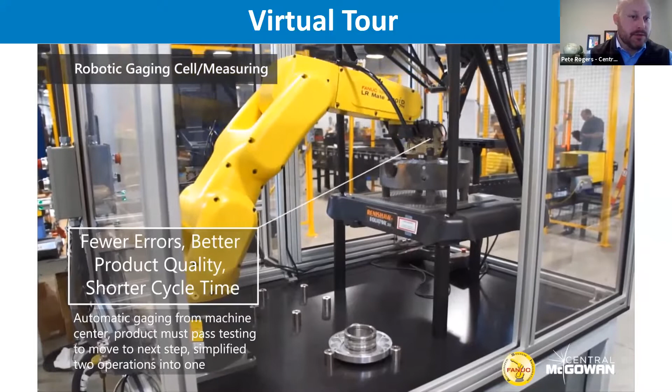One of the benefits of automation as well, when I was talking about part consistency and some of the assembly processes, is being able to take some of the quality control and bring that in process. This system here is literally a robot picking up a part, setting it into a small CMM and getting measurements on it. And so what's happening is you'll see two locations where the part can set.

This actually is getting smashed in between a process. So a robot's actually loading the one station and then another robot's unloading the other station, right? So this robot's job is literally to pick this part up and put it in a gauge and measure it. Some of the cool things happen with a system like this, especially in machine tending.

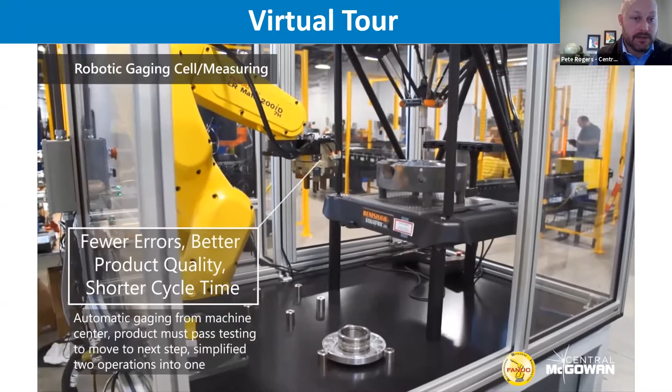So you imagine you machine 700 parts and then you gauge a couple of them and you find out, oh crap, 200 of those parts, I had a bad tool in there, they're all scrap, right? This allows you to measure every single one, but now say you did find a scrap one, you can shut that machine and that process down immediately, right? So you might end up with 2 bad parts or however many are in queue instead of 200 at the end of the day.

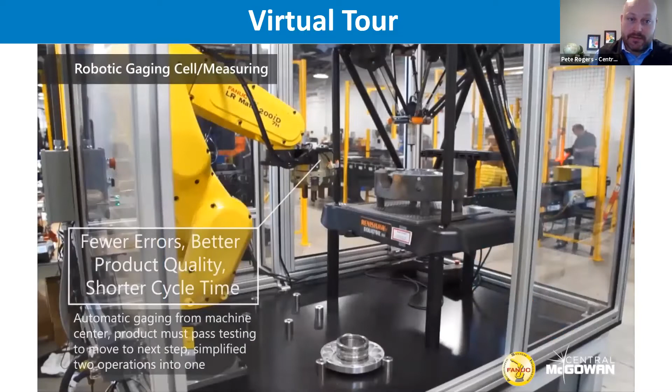So this is a big thing with the costs of some of this inspection equipment, CMMs and stuff coming down. That's actually allowing you to 100% QC check all machined parts and be able to really have control over scrap, right? And so instead of scrapping a large batch or finding out that half the shift that day we were doing something wrong in that machine, it allows you to narrow that down to every single part

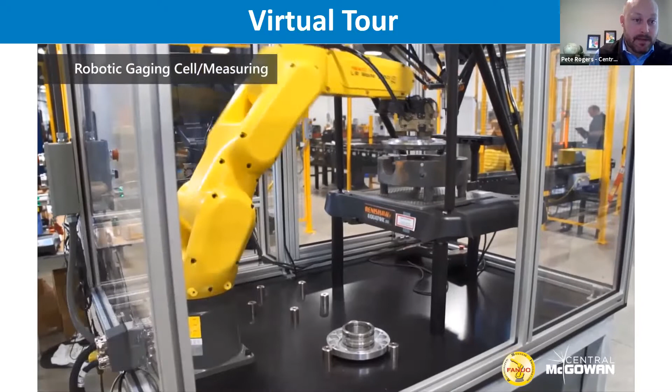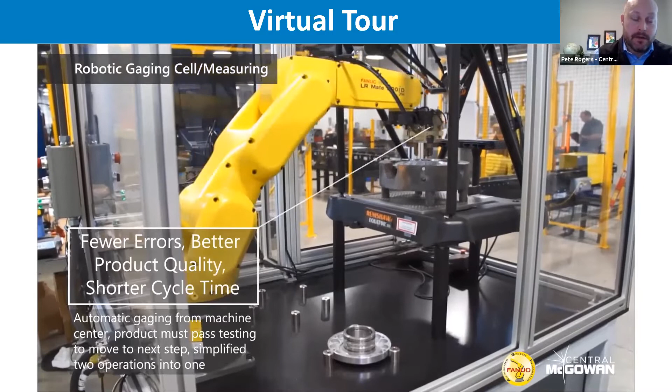and really control those costs. We've had some processes I've seen in the past in machining, some really high-end machining, very delicate, where their scrap rate paid for an inline QCing of it. If they could eliminate 80% of their scrap by doing this, it more than paid for a robot to be double checking the part measurements right in process. So that's a very cool concept. It brings you closer to that lean manufacturing or single part flow.

Next video here is an example of something I spoke about earlier, plasma cutting with a robot, right? So feeding a tube in and having the robot programmed to perform the cutting over and over and over again. Very cool, very easy to program, but again, the biggest thing is just going to be the consistency with this. You're going to get the same cut every time, even better than relying on an operator to do this by hand or doing it some other way.

So a lot of different possibilities with this too, with square tubing, round tubes, I-beams, anything steel or metal you can get in there to start cutting. You can put a plasma cutter very easily on the end of a robot and allow it to do the cutting. The cool thing is nowadays, with everything shifting towards the 3D CAD world, right? There's still a lot of drawings out there that are 2D. There's a lot of people moving into the 3D world. There's a lot of offline programming software, right?

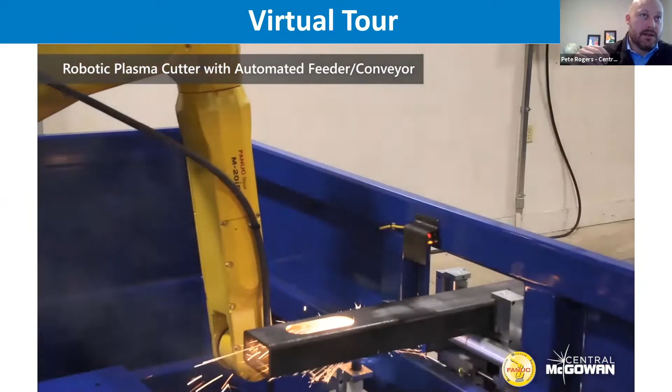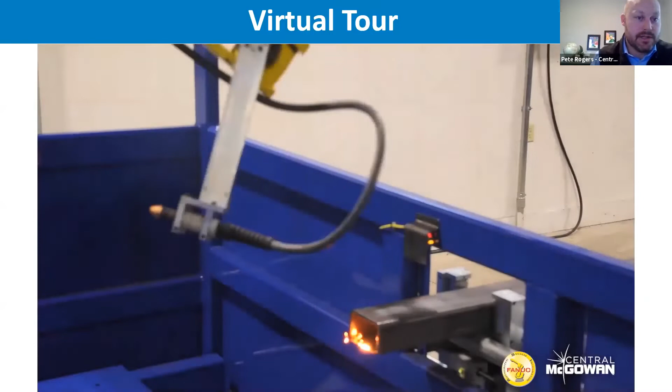So historically, you need to teach the robot to run this path that you're seeing this robot run. There's software out there now where you can load all of this in virtually, given a 3D model of everything. It has exactly how the robot runs and how it does that. You calibrate the real system to the offline system, and from that point on, you could load in the 3D CAD of that part it just cut and tell it, I want you to program this part.

And so the software will program it for you. You bring that file out to the robot, load it in, do a couple test cuts, and you're cutting it. And so instead of shutting production down to stand there with the robot and teach new parts or add parts to a system, you're able to do that from a desk while the robot's running production, right?

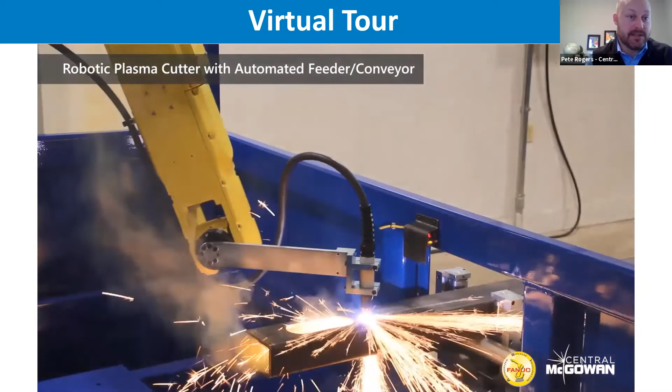If the robot's not running production, you're not making any money on it. So to be able to program something offline and have the robot shut down for 10 minutes instead of a half a day, that's huge.

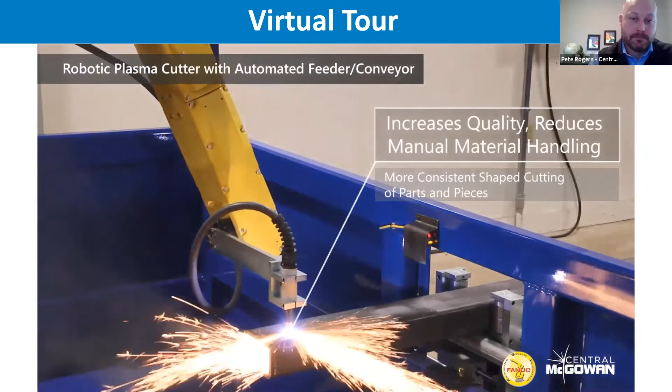Historically, without vision on a robot, if you don't set that part in the exact same spot for it to pick it up, it's only going to the spot you told it, right? So now the advances in vision, whether it be 2D vision or 3D vision, allow you to be a little less rigid in areas. The robot finds the part. Maybe there's clocking needed on the part, right?

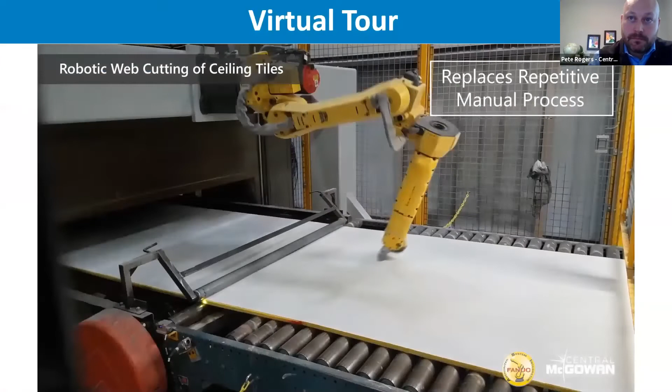This is just a fun one to watch, but what these are is ceiling tiles, right? So you imagine the ceiling tiles you've got in an office or whatever, but this is a cool example of a robot doing cutting in process. The coolest thing about this is the part never stops moving. So there's options now with what's called line tracking, and you can put a rotary encoder, which gives feedback of speed and position to the robot.

It's the same thing they use on the motors on the robot itself, but you can mount that to a conveyor or to a press brake or to a myriad of different things, and the robot knows the exact speed that this part is running and can do its process while the part is moving. And so this robot, and it's tough to tell in this video, makes a perfectly square cut even while the part's moving. So the cool thing is you don't have to stop, make a square cut, start again, stop. This thing just does it really on the fly.

So there's a lot of things out there now that allow increased throughput in robot systems because you can keep the part moving. For example, that first assembly system I showed in the what can be automated section of my presentation, those parts were actually all being placed onto fixtures, and there's 4 fixtures on 13 different rungs on a conveyor, and it never stopped moving. And those robots just kept assembling the pieces as they were moving down. They got crimped together and dropped in a basket, but they never stopped. They were always moving. So some really cool options there as well.

Got one more video for you guys here. These videos get pretty limited out of our automation group because there's some you can show, and a lot that customers ask you not to. So this one here is actually depalletizing. We talked a little bit about palletizing in the presentation where we're stacking boxes.

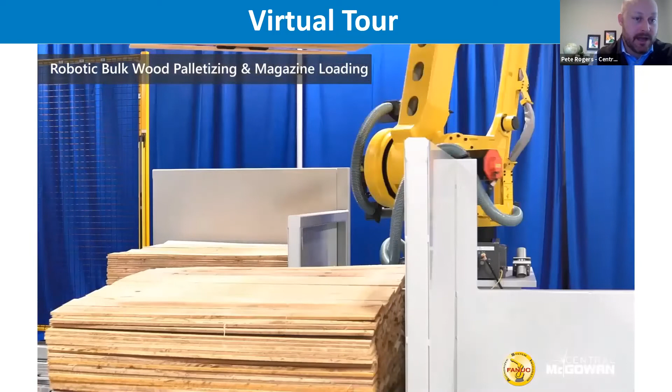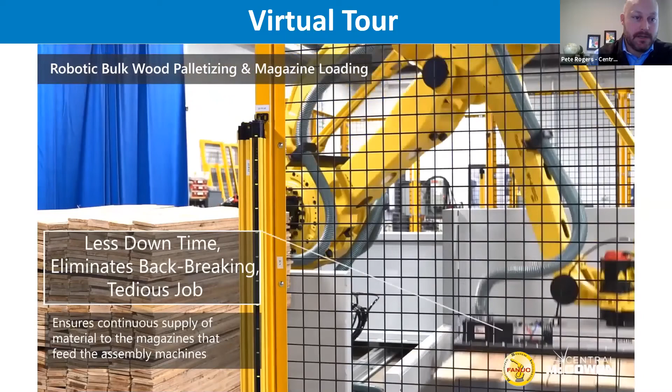This is actually taking a pallet that's come into a customer with a whole bunch of wood stacked on top of it, and it's depalletizing the wood and putting it into a cartridge that is then feeding a machine that builds pallets, right? So those are slats for a pallet. And so what this allows you to do is feed an assembly machine with a robot without having to have somebody stand there and take wood planks off of a large pallet all day long.

So that is what I have for the virtual tour. Like they mentioned, I'll